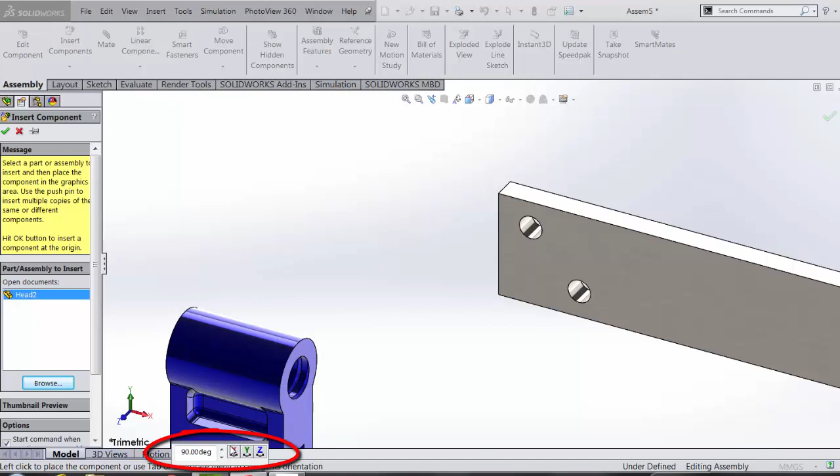Now we can clearly see that head 2 is the wrong orientation. So down in the bottom, as the part comes in, we can see here we have a small pop-up toolbar appears, and I am just going to orientate it about the X or the Y axis, by 180 degrees, so it's the correct way around.

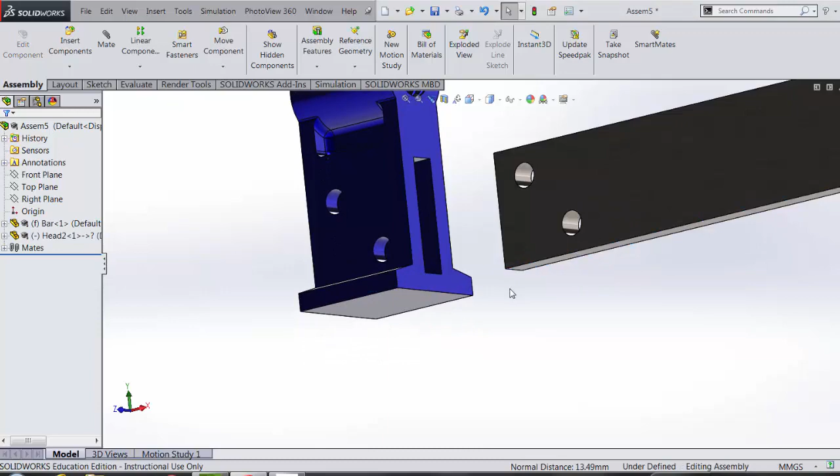Okay, so using quick mates, I select one of the faces that I want to mate, hold down the shift key, select the other one, and our pop-up toolbar appears. I select the coincident mate. Do the same thing again, select one of the sides, hold down the shift key, select the other, and we've got the mate achieved. Same again for the third time, and now the parts have been mated together.

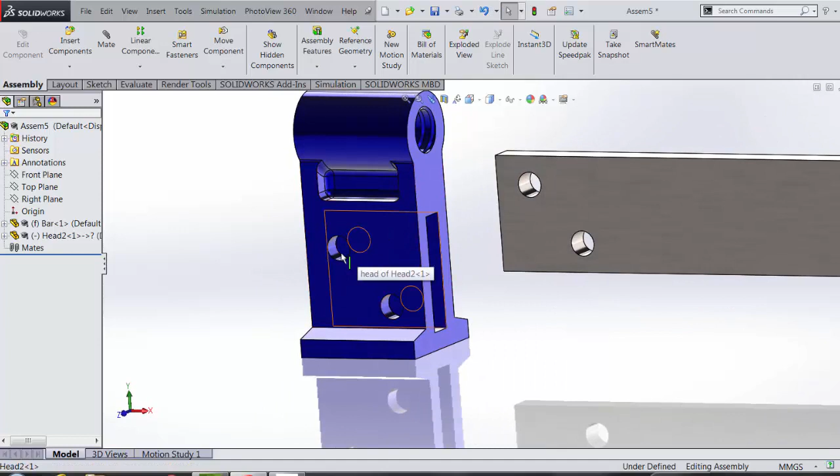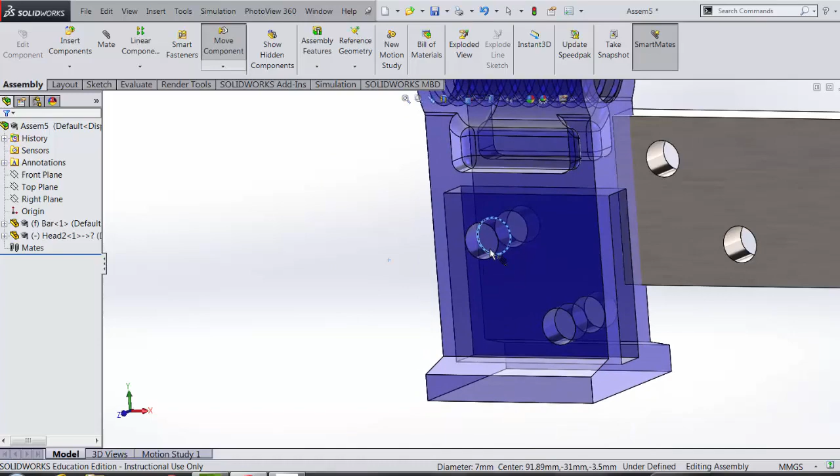An alternative way of mating these components is as follows, using the alt-drag method. Here I want to mate the circle, the inner circle on the front face, with the circle on the face of the bar. So to do that, I hold down the Alt key. Once I select the circle, hold down the Alt key and press the left button of the mouse and drag it over to the position. And there now, it's as quick as that.

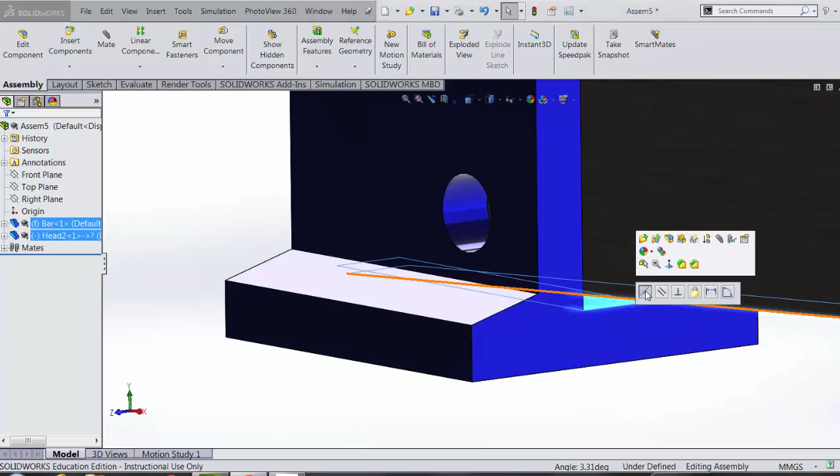Then I can use the quick mate, selecting the bottom face, hold down the shift key, select the other one, and a coincident mate there. Now those mates have been achieved.

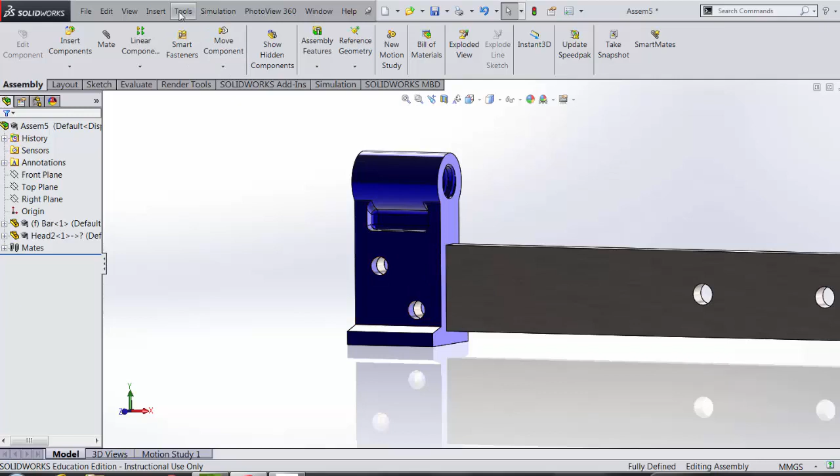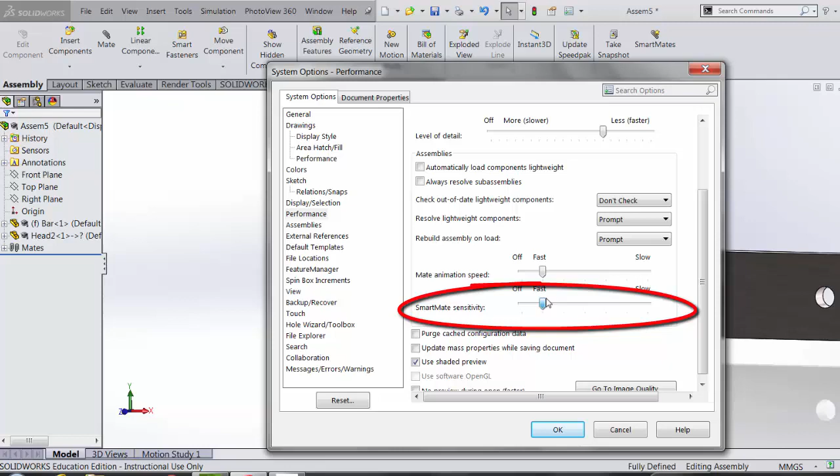The alt-drag method is a very quick way of mating. But however, if there is a lot of holes in the vicinity, it can be oversensitive. So to reduce its sensitivity, we can select Tools, Options, Performance, and scroll down to Sensitivity. As you can see here, I have it set at slow at the minute. So it means that it has to hover over the various part for a while before it actually clicks onto the mate.

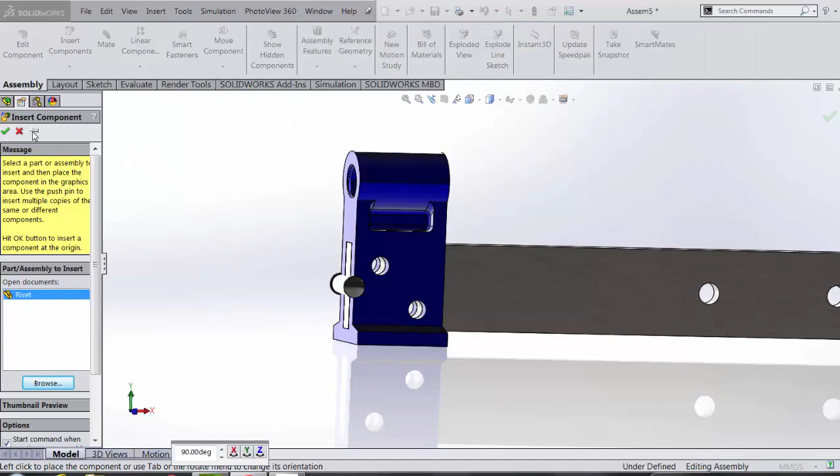So the next part I'm going to bring in now is the rivets. Insert component, the rivet, and I need 2 of them, so press escape. And just bring them closer so we can see clearly what's been done.

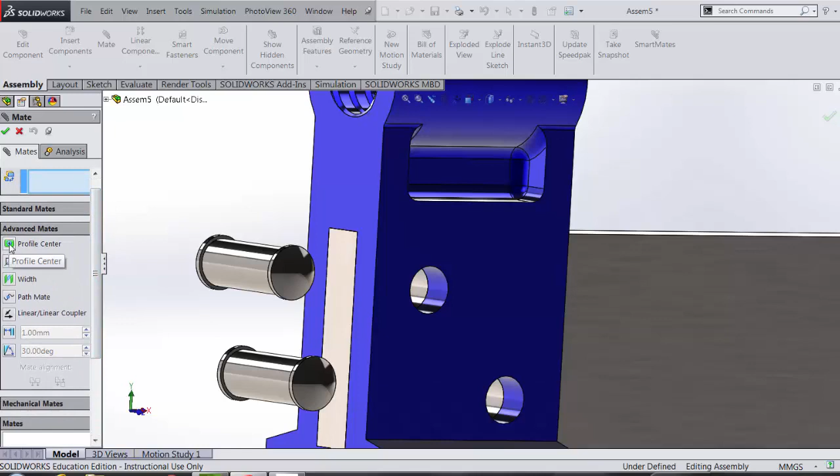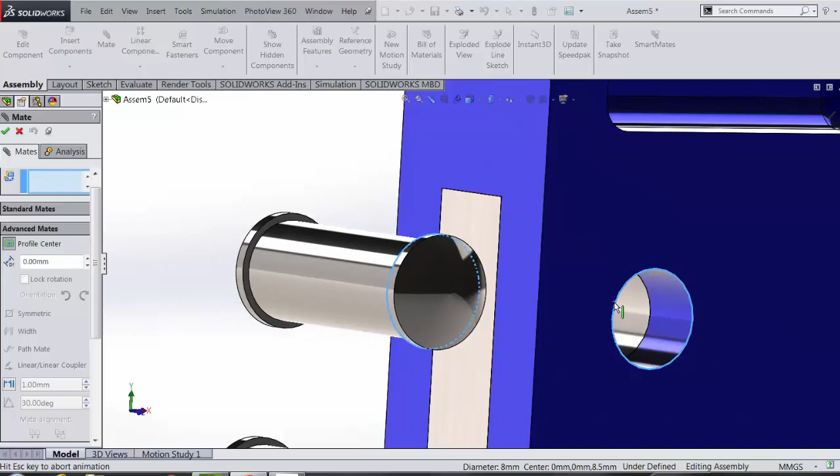Now, for connecting the rivets, I'm going to use Profile Center. In Profile Center, I will select Mate, scroll down to Advanced Mates and select Profile Center. When I use this mate, I will zoom in and select the inner circle of the rivet, as you can see here. Click there. Also click the circle on the outer face of the head, and the rivet goes into position immediately.

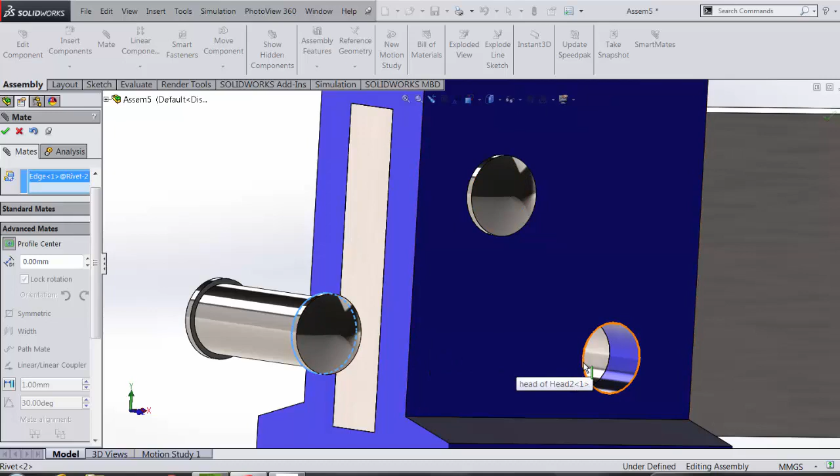And if we don't want that rivet to rotate, we could click on here, Lock Rotation, and accept that. Same thing again for the second one. Select Profile Center, select the circle in question, and the corresponding circle goes into place immediately. Lock Rotation is already pressed, so now the rivets go in as quick as that. That is a very quick method for connecting screws, bolts, and so on.

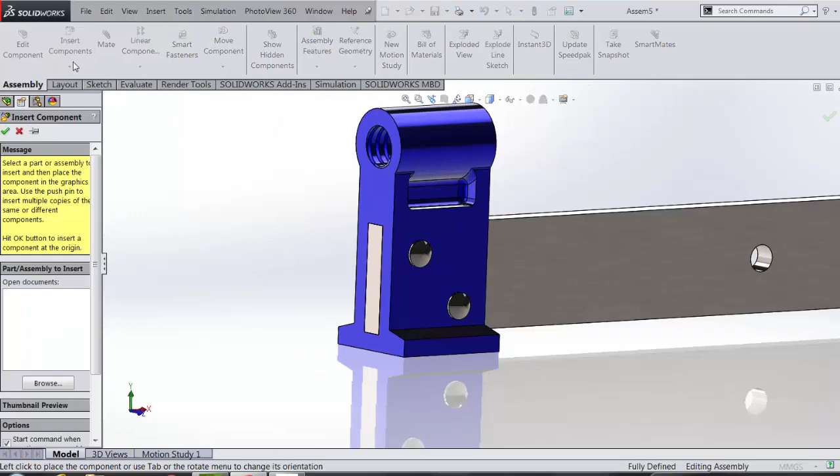So we'll accept that. The next part I'm going to insert is slider 1. As we can see here, slider 1 has got the correct orientation, so we'll just move it about there. In this I will use Smart Mates.

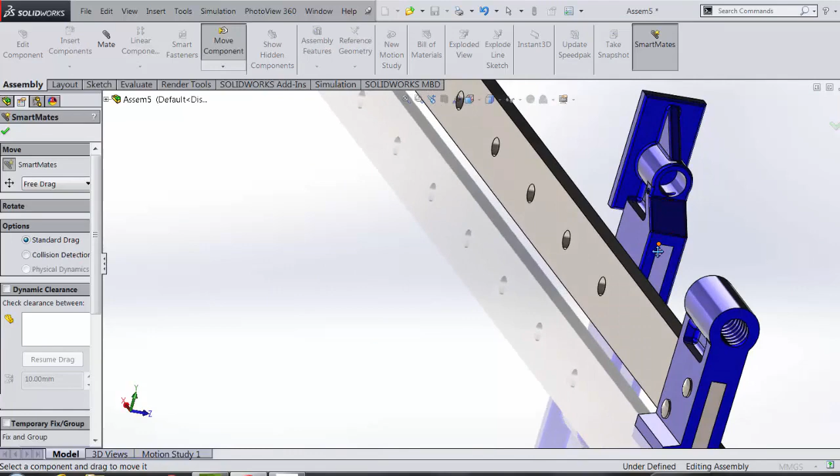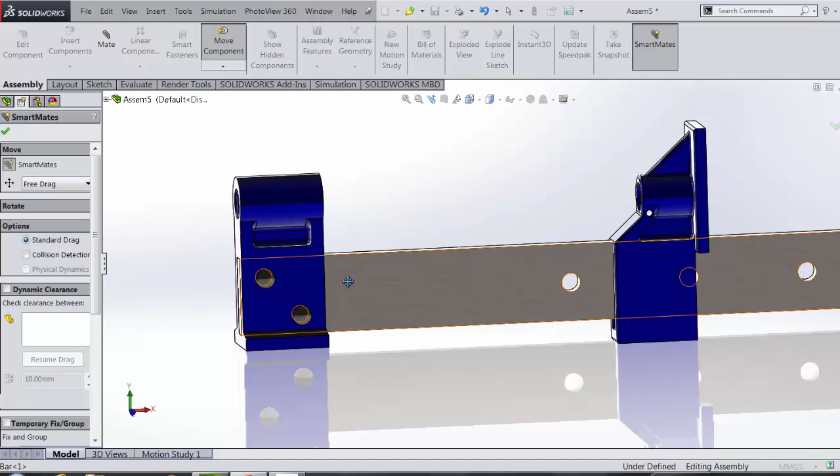For Smart Mates, double click the face that I want to mate and click the corresponding face and accept. The advantage of Smart Mates is that it allows you to rotate the object, where the Alt Drag method doesn't. If you're using Alt Drag, you cannot rotate the object.

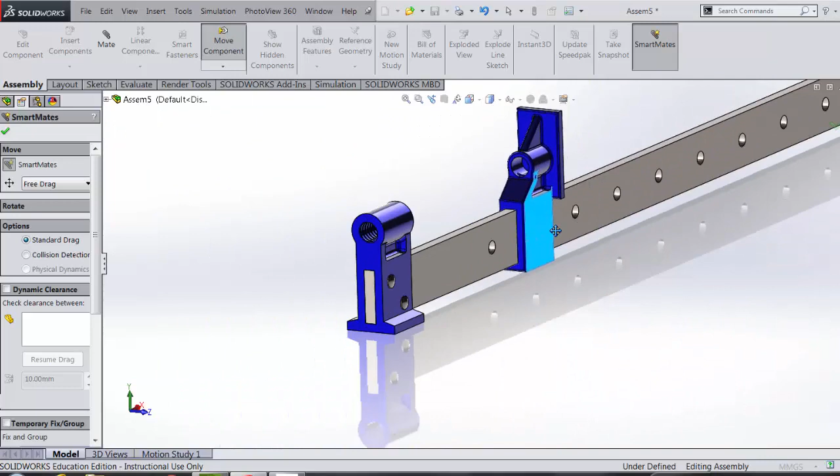So once again, in Smart Mates, double click to activate the Smart Mate and accept. As we can see here now, slider 1 is in position and can slide along the bar. Accept that mate.

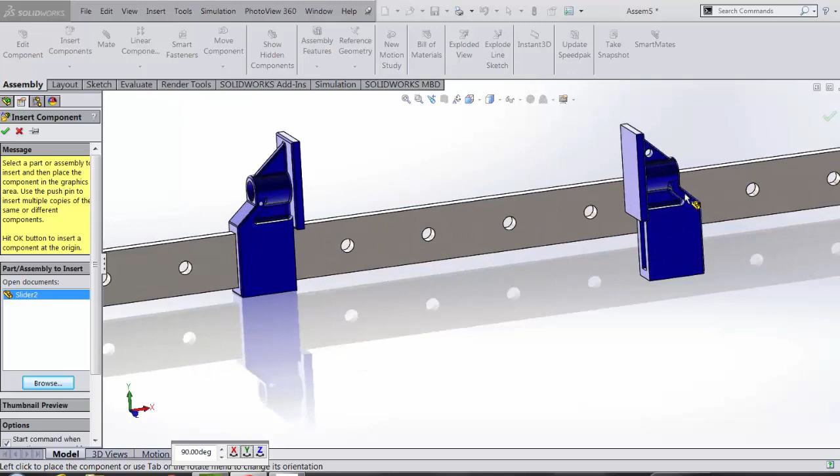Bringing in slider 2, insert component, browse, slider 2, open. And once again we can see here that it's orientated around the wrong way, so about the y-axis I'm going to rotate it by 180 degrees. Slider 2 now is in position.

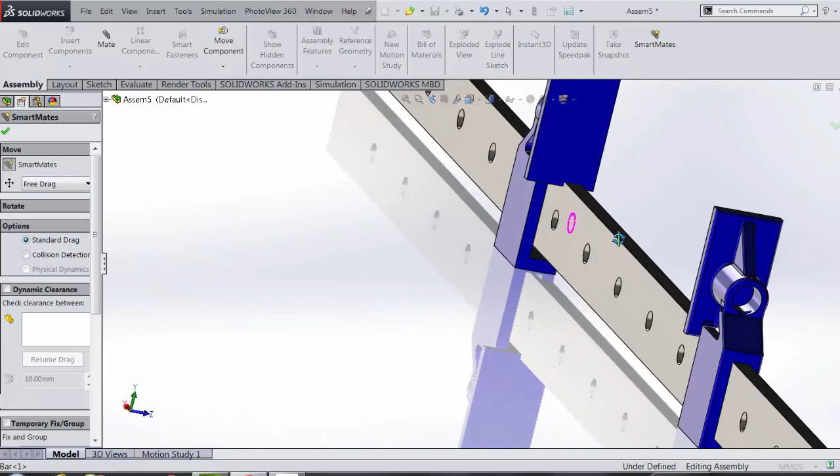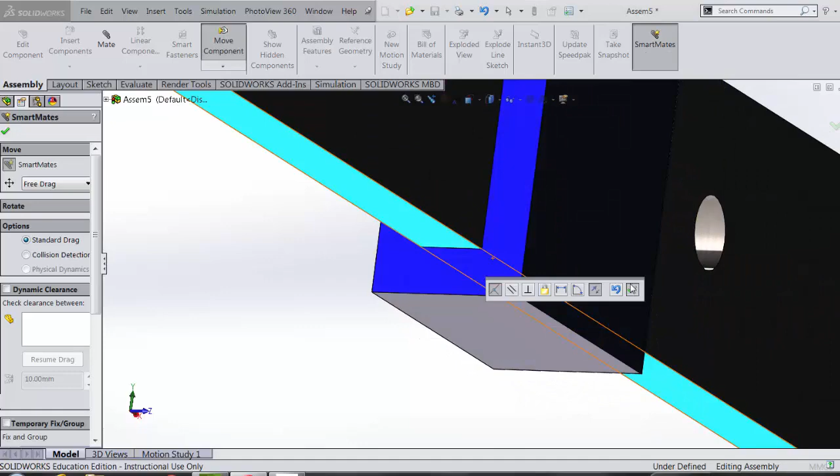And the Smart Mates. Now the Smart Mate was always there, but it was always in the Move component. But now in 2015 it's got its own icon there. So once again, select Smart Mates, and we have to double click on the first face to activate it, and then select this face to mate and accept. Again, double click and click. So 3 clicks of the mouse and you're done. The second slider now is in position.

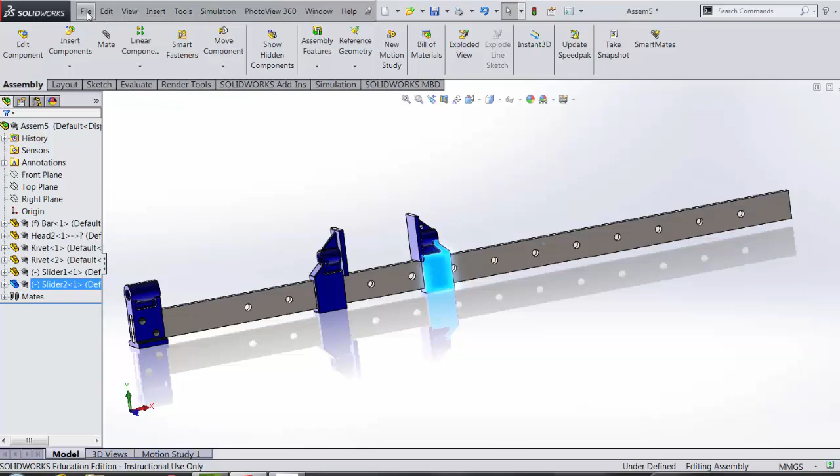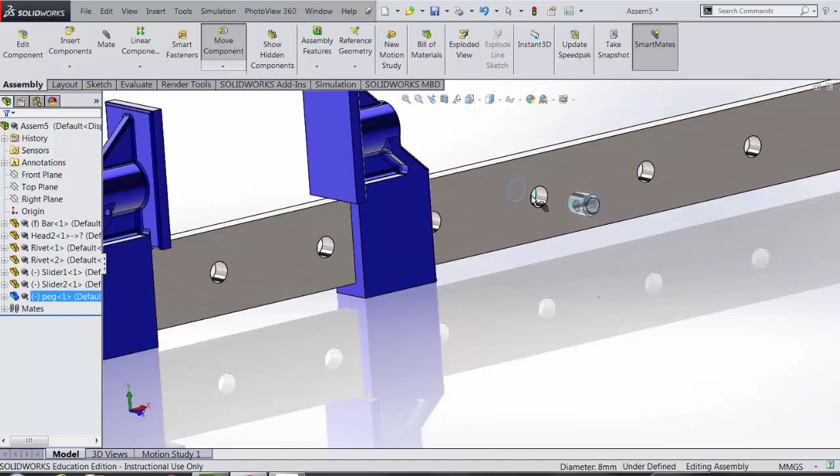The next component we're going to bring in is the peg. Open. So bringing in the peg, once again we change its orientation, and the Alt Drag method is probably a fast way of getting the peg into its position there. And we'll leave it that it can rotate for now.

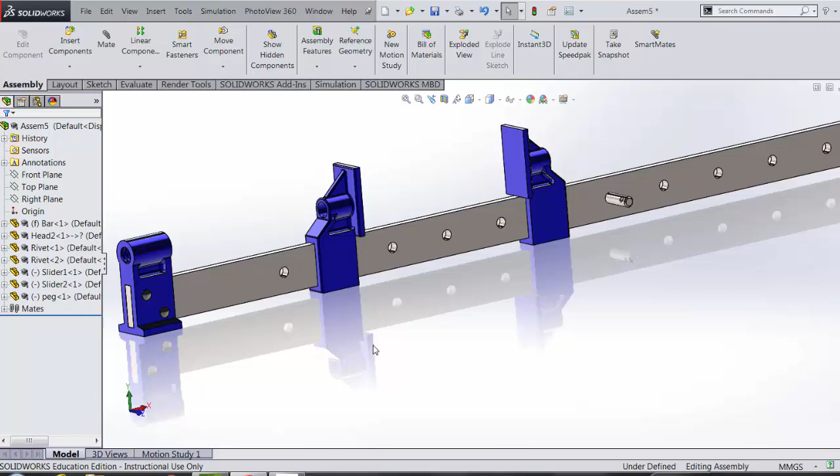That will end this exercise. In the next exercise, we will be looking at screw mates under mechanical mates, advanced mates, width mate, and temporary fix, and so on. And we will need those when we insert the rest of the components.